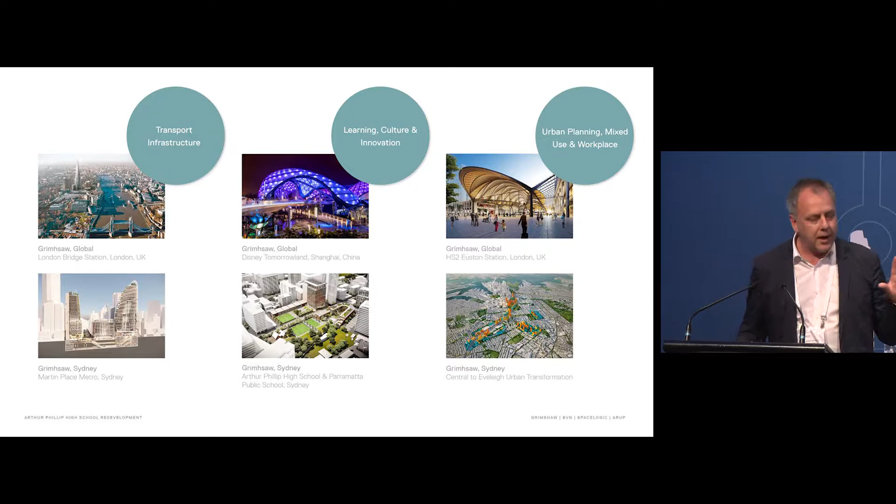We're a global practice, operating across a number of different continents. We have over 500 schools. Why is that important? Because we're designing schools for the possibility which that represents to many people. This idea of globalism is something which is now becoming a really interesting part, and why you're here. We work across many typologies, from transport, learning, and obviously urban workplace. All the threads of that come into how you consider the design of a school, where it goes, and what its end purpose is.

This is a scheme I'm going to present: Arthur Phillip High School, predominantly a competition scheme that we won with Bligh Voller Nield, Spacelogic, education consultants who worked on the UK's Building Futures program, and Arup doing all the engineering and Aspect the landscape architects. We've had 180 stakeholder engagements from design, and we're on site at the moment.

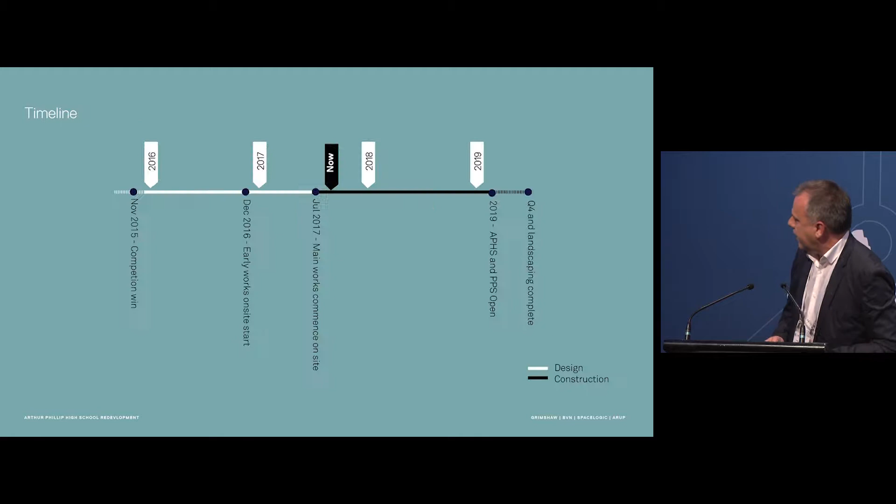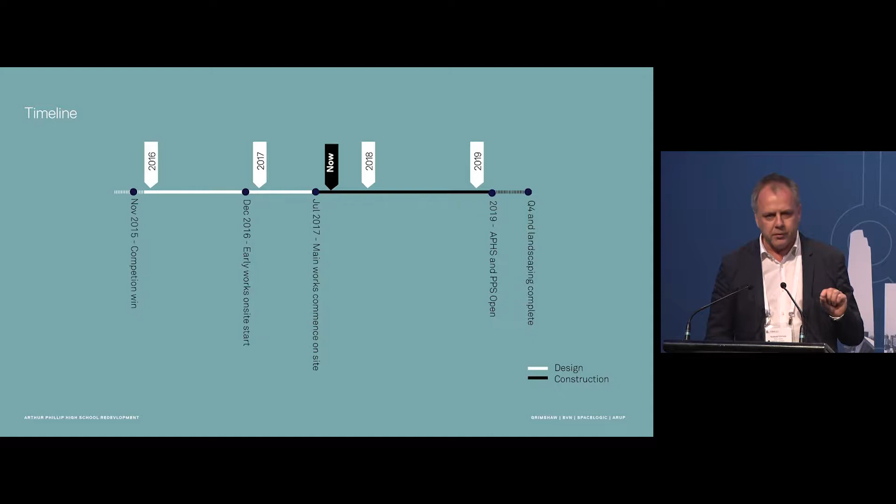It's not just a vertical school, it's a new educational prototype for future-focused education, with a transition phase from the current curriculum. It's a brand new building typology as well, which has been completely engineered. It's been rapid — we will have gone from award to construction completion on this project in 3.5 years. And that includes fundamental changes to the industrial legislation of teachers to enable them to work in a building like this.

Why is that important? When we get to Sydney — Sydney is 24% of Australia's GDP. We don't have any mining and we don't have any farming, so the majority of Australia's GDP growth and the significant change is coming from our major East Coast cities. What's underpinning that finance and construction is innovation, knowledge services, creative industries.

The future of our nation, its health and prosperity, comes from education. It comes from its understanding of its place, its interaction into global economies. We are a global city, and we are educating our children into that situation.

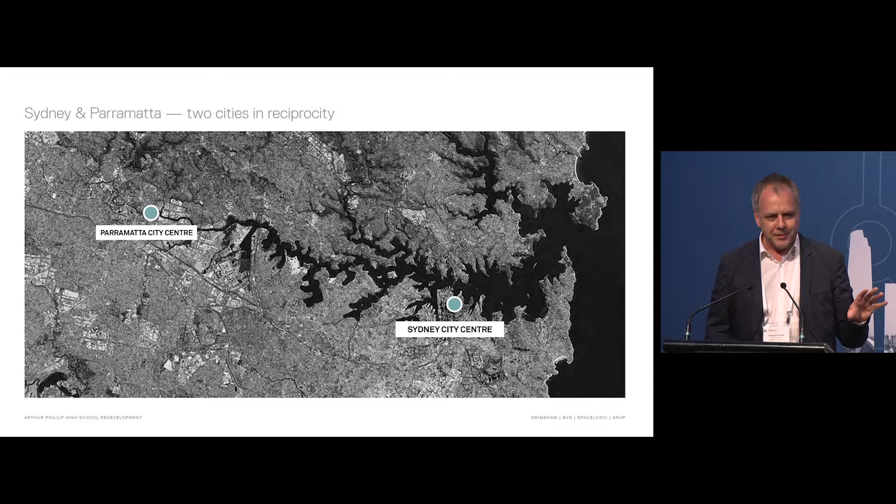We all know about the fascination of Sydney. We always talk about Parramatta — I love to use this term ironically, where settlement first occurred. But we all know that on this particular site, Arthur Phillip, we've uncovered 40,000 years of evidence of Aborigines on this site. So it is an interesting place to put this building.

We call them the two cities, working in reciprocity: one as the demographic centre, and also the place where it's at the centre of how we address population growth, but also looking back to Sydney where it still remains the preeminent location of our global city. Even though the Greater Sydney Commission has us working in 3 cities, Sydney is still the centre of where that productivity is focused. What does it mean for schools?

We've got a lot of schools to do, and as it came out in the papers today, a lot of the growth in schools is still relying on demountable classrooms. So building big, dense, quick schools is one of the key opportunities to address the pressures on education.

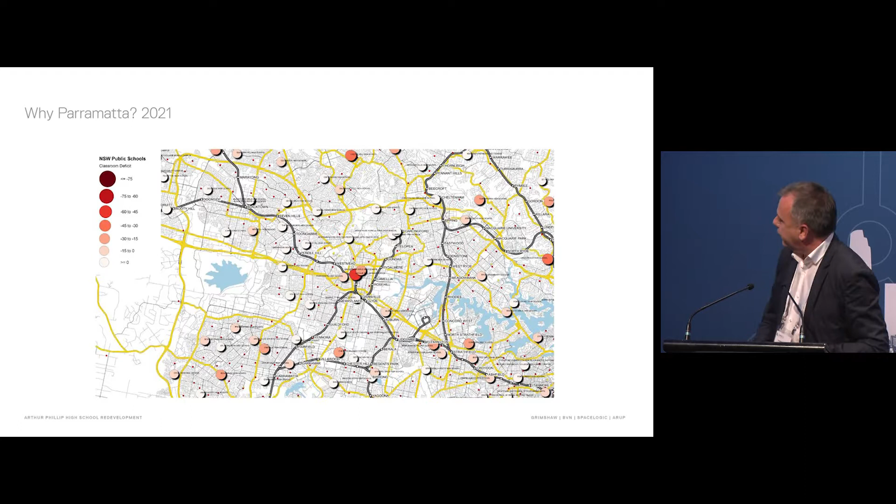Obviously we all know Parramatta — I've got to move very quickly. Other thing about Parramatta, it's got some of the most diverse communities living there. So the department have chosen one of the most interesting places to build a new school prototype.

And what does it mean to the city? The big thing about schools now is that they're shared social infrastructure, so the facilities of a school become shared with the cities they're building in. With Parramatta School, they've put a large school at the centre of the city — learning at the heart of centres for urban renewal.

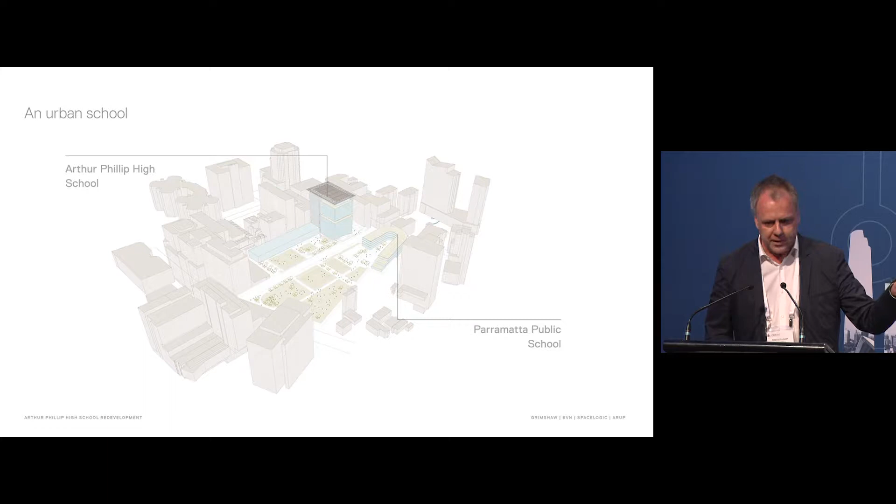Again, back to that theme — the priority to understand its place within the world. Exchange can happen in many ways, including the ability to have digital interaction. So, the school: 2,000 students, 17 stories, 1,000 students for the primary school.

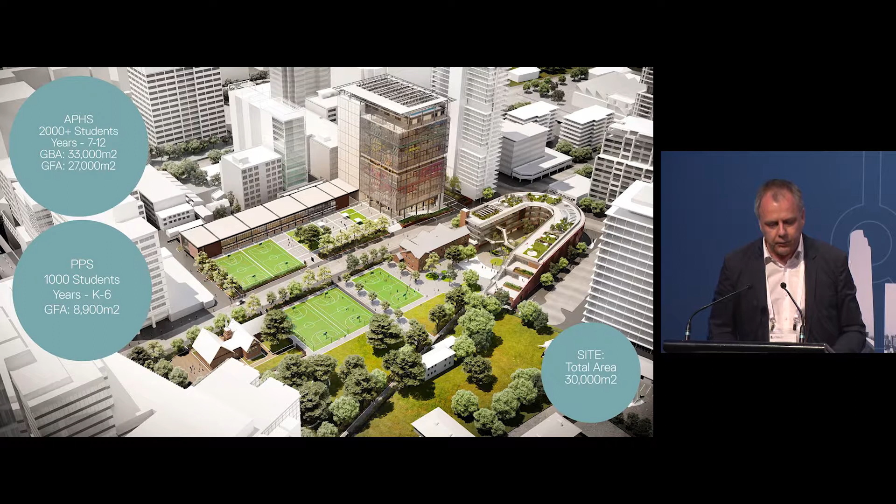Teaching — we all know we're going to address pedagogy here, which is about learning styles. Teaching used to be the didactic model in classrooms, which everyone knows about, but we're transitioning into future-focused learning in a vertical environment. What does that mean?

We're talking about breaking down schools of that size into smaller communities — we call that the school-within-school model. We're moving to stage, not age, learning, so all ages, all stages in communities, and project-based curricula — learning through groups of people focusing on experimentation and group-based investigations. You'll hear about the STEAM uses: science, technology, engineering, arts and mathematics. That's where the key innovation is being focused on at this moment.

So, how do you design a school?

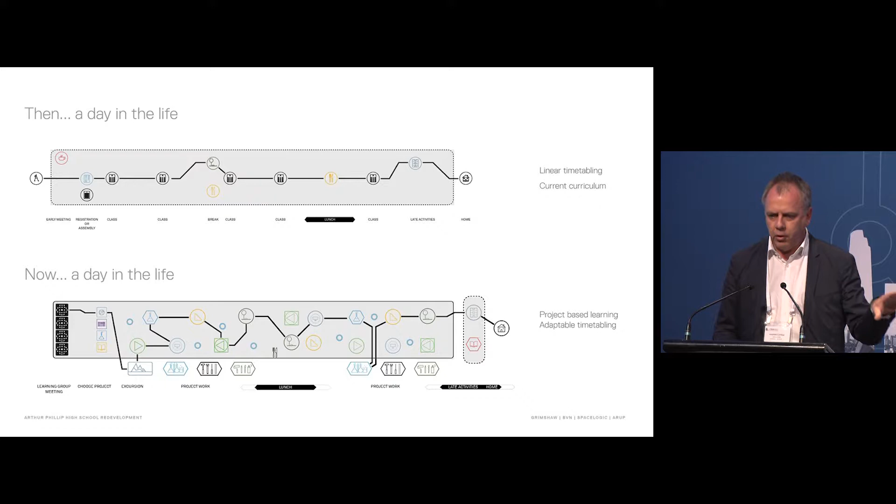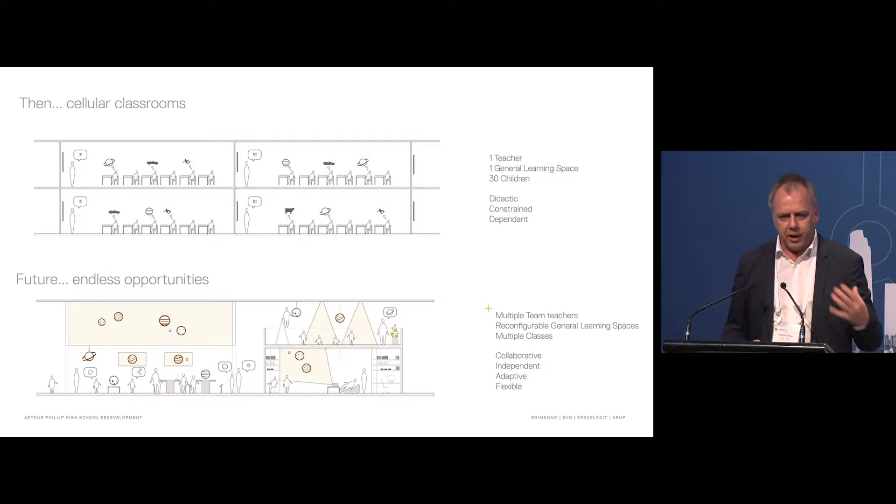We're moving away from periods where you step through the day through a series of times. Now, with project-based learning, you use your facilities to design your own learning format, so it's not as structured. This idea of how you structure movement becomes critical, and spaces are much more diverse, have greater volume, and are used for a variety of things.

With a school of 2,000 students, we've heard about Dunbar's number, which says what's the maximum amount of people you can have in a community - it's around 150. We're extending it to around 300 to 330 for a school. In the primary school, we break it down to 3 communities plus a kindergarten. In the high school, it's based around 6 communities of around that 330. We put the communities in what we call home bases.

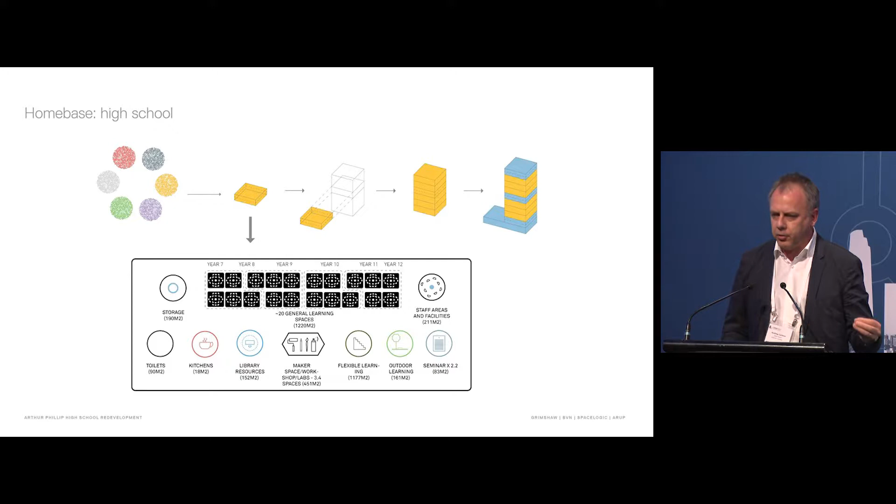A home base has all the needs for your school day - outdoor learning where you do practical activities, withdrawal rooms, bathrooms, storage, and all the facilities. In a high school it's much more diverse, including the library - you no longer have libraries as separate spaces, they come to you. You have flexible learning, formal learning, informal learning, outdoor learning, seminars, and some labs as well. Staff are located within the community, and all the needs are there.

The historical derivation of the school - classrooms from the 70s, breaking up in the 80s with more flexible furniture, then moving into the 90s where classrooms have been adapting and opening up together. Then we move into the academy model, which works up to a maximum height of 3 to 6 stories, where flexible learning opens up into informal learning connected through circulation, with many different types. Most of those schools in Australia that have been 3 to 6 stories are less than 1,000 students.

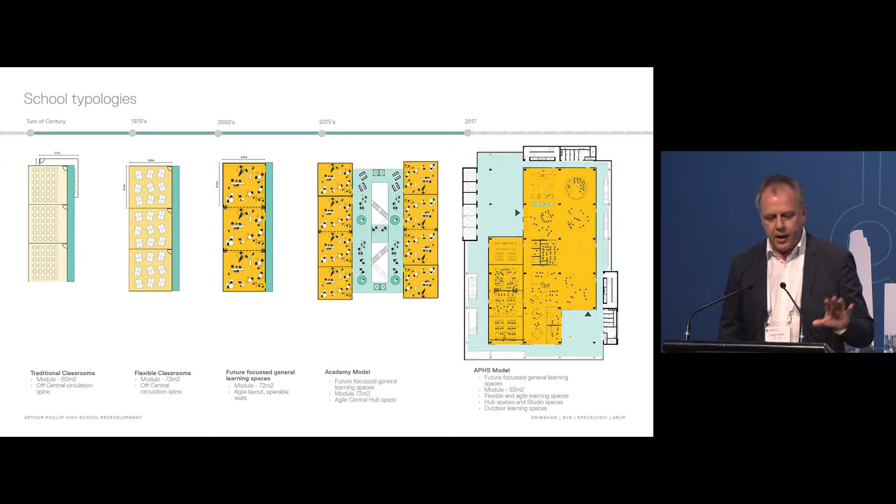So for 2,000 students, we're talking 17 stories, big floor plates, big needs for circulation to work and support access to a variety of spaces. The 17 stories we break up - I'll talk about in a moment - between 6 home bases, which are over 2 stories, and we have STEAM floors in between base, middle and top.

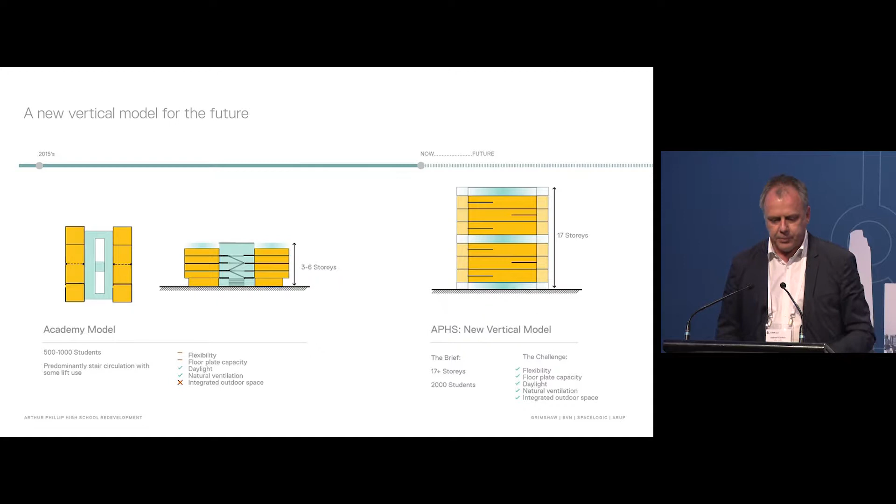We also talk about the relationship between schools, universities and workplace, the intersection between millennials, Gen Y and Gen X, knowing that we're always designing for the future, not for the current or the past. And the focus on learning, from learning to enterprise - understanding what the purpose is behind learning. Learning is not the same as you go through different age developments.

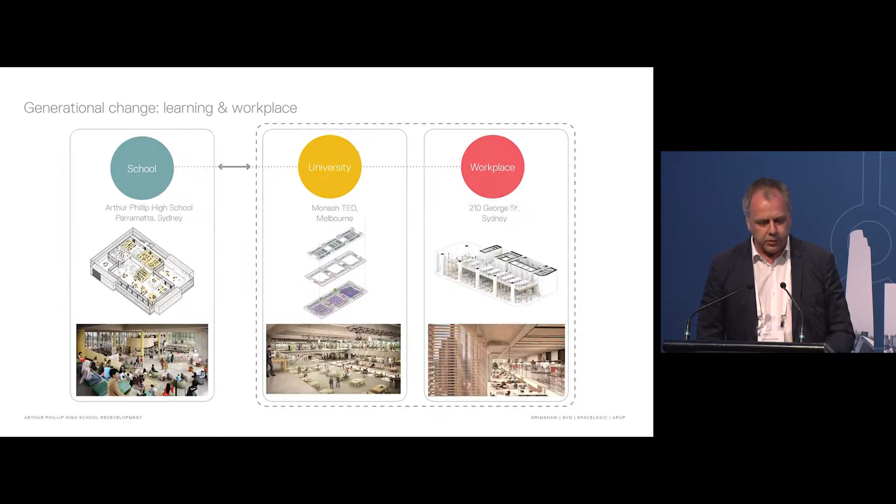Again, I'll run through this very quickly because I've already hit 15 minutes. So quickly, what it looks like.

That should be an animation. I hope - no? I need it to work. Technology person, can I have a pause on the time frame? It's not playing. That's not good, I'll give it one more try. They said it would work. All right, that was the animation, which was just going to go all the way through the building. Right, improvise - how does it work? Now that you've seen what it looks like, now I'm going to show you how it works.

We talk about a transitioning model of a school, meaning we have to understand the current curriculum - you can't go into the future without transitioning from the current. While we've broken it up into 6 communities, based in years 7 to 8, 9 to 10, 11 to 12, we've curated what happens in those STEAM floors.

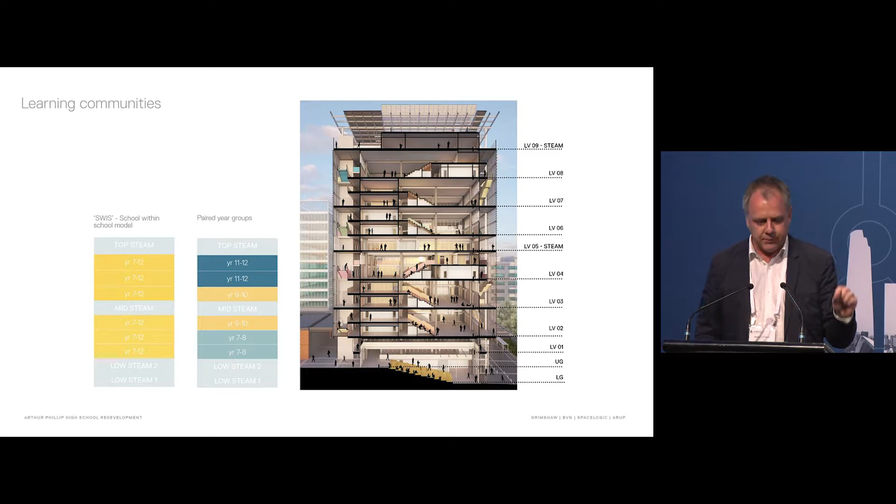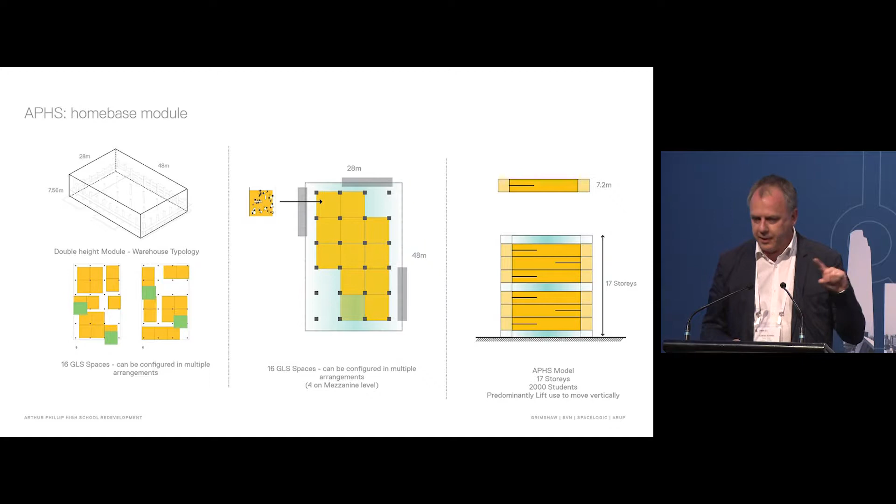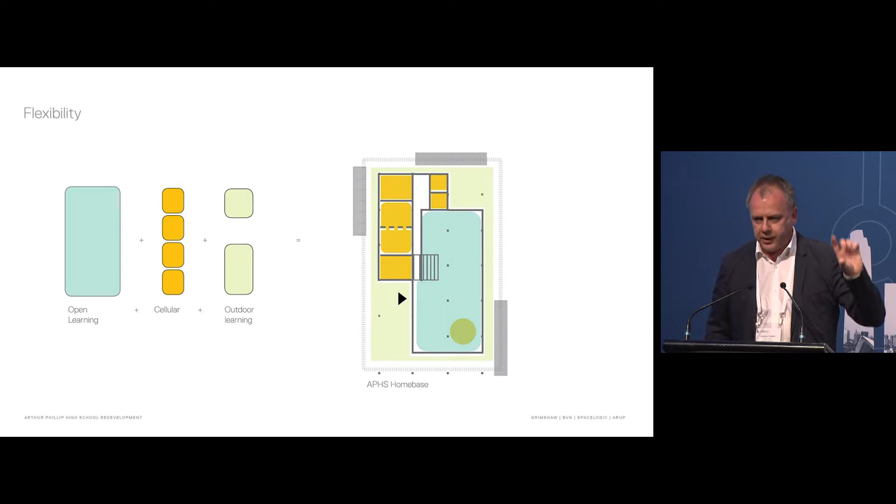It's based upon a classroom module of about 90 square metres, including circulation, which we then aggregate together into 16 modules. In those 16 modules we then have outdoor space. Then we put in that space a mezzanine, and the mezzanine has what we call the cellular spaces, which can be used for traditional classroom teaching, or we can introduce some dry labs, seminar rooms, or quiet spaces. Then you have the open learning, which has got the future-focused learning in the double height spaces, with a whole series of different teaching furnitures which support it.

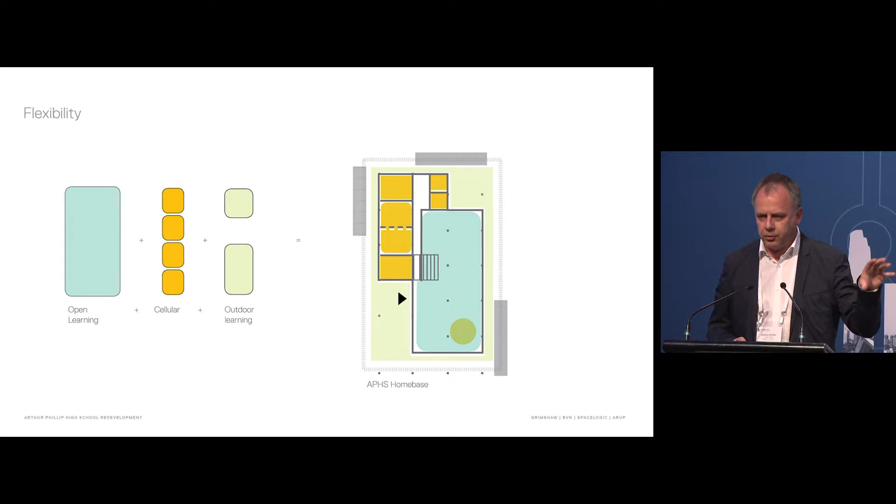We've got the outdoor learning space wrapping around it and adjacent to it, so you can live in your community with your outdoor learning at any level in the building. The home base, the multi-purpose range we've gone through before, but the important thing to state again is that everything occurs in that space. In terms of moving up and down, in a vertical school you get to your home base, you can stay there for the day and just move up and down between the STEAM floors if you need to.

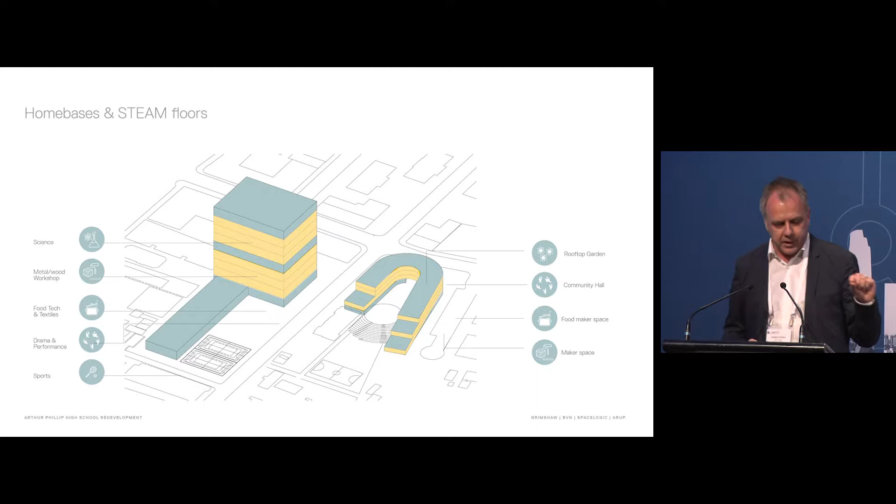And of course, we've situated it so that the levels at the base can be used by the community, and they've got drama, performance, sports, food, tech, and textiles. In the middle, it's got the intermediate levels focus on enterprise, which is the workshops and digilabs, and at the top we've got the science laboratories where they have the highest need on services.

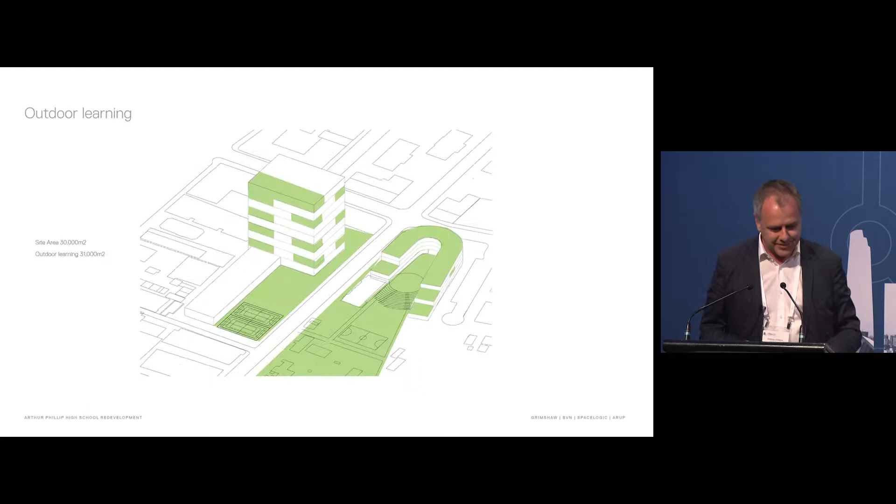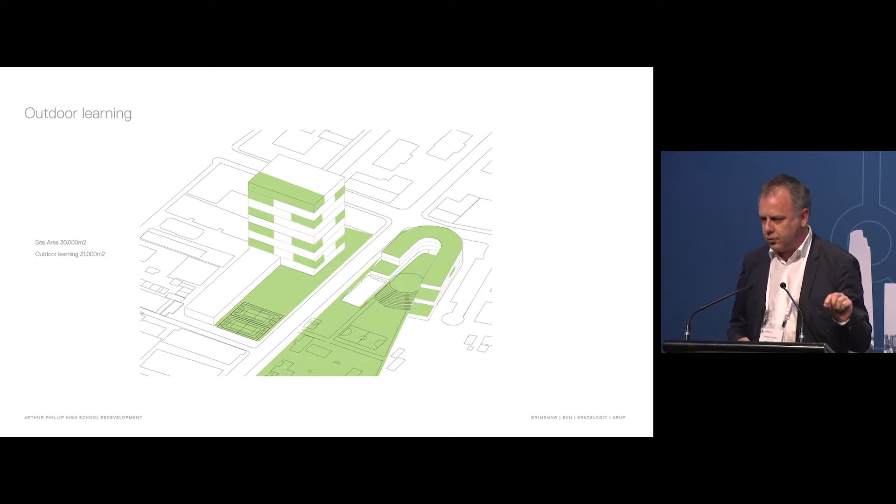On the primary school, of course, we have the rooftop terraces. The amount of outdoor space, the total site area is 30,000 square metres. The outdoor learning spaces are 31,000. So the idea is that you don't lose outdoor learning space. What we're saying is if you take your space and put it through the building, there's no loss. This is a school on an existing school site, but we've increased the density by 100%.

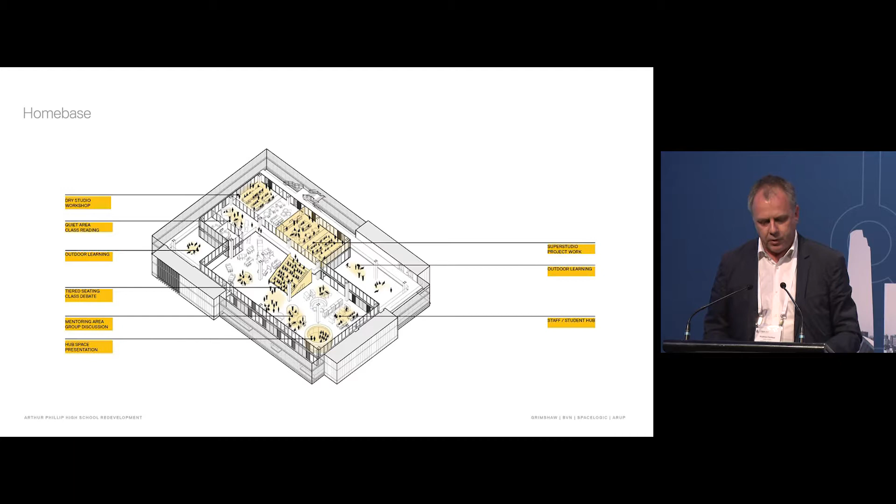Going to the home bases, this is the structure, how they work. The L-shaped mezzanines sitting in front of or behind the double height space with the outdoor learning around it. The educators or teachers now roam around. They've got their own little trolley which they move around, and their own staff hub within it. And then they begin to look like these spaces. Almost the height is important for getting the right level of environment, daylight, ventilation, but the volume that you need is to get people looking across each other and interacting with each other, and to do that problem or project-based learning.

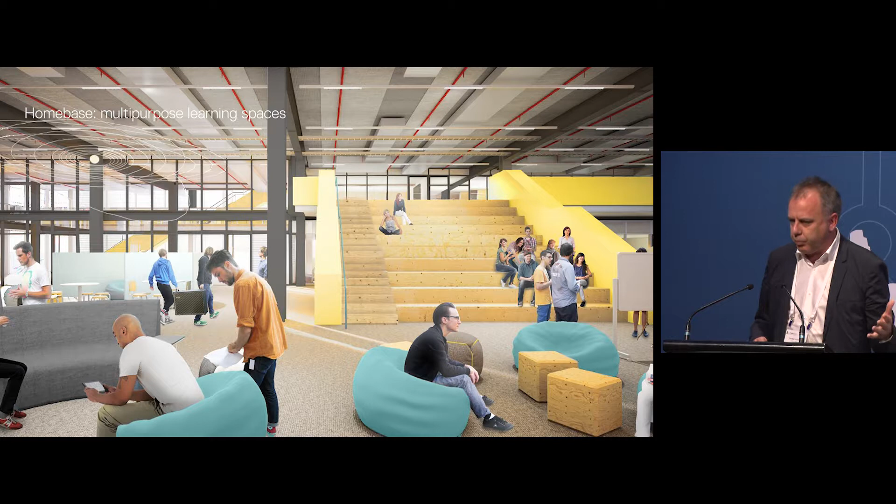The outdoor learning spaces which are offered are outdoor, they're screened from the rain and some of the high level winds, and they have the vertical circulation, being the lifts or stairs, meandering through it on all sides of the building. The thing here is that while they're exposed on some climate, there's always two on each level, so you can move around the building or up and down to get to any place with the right level of clemency.

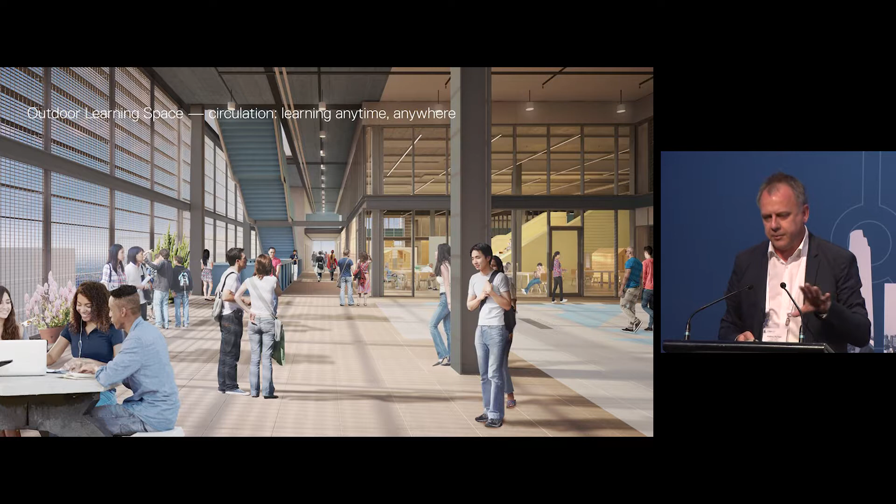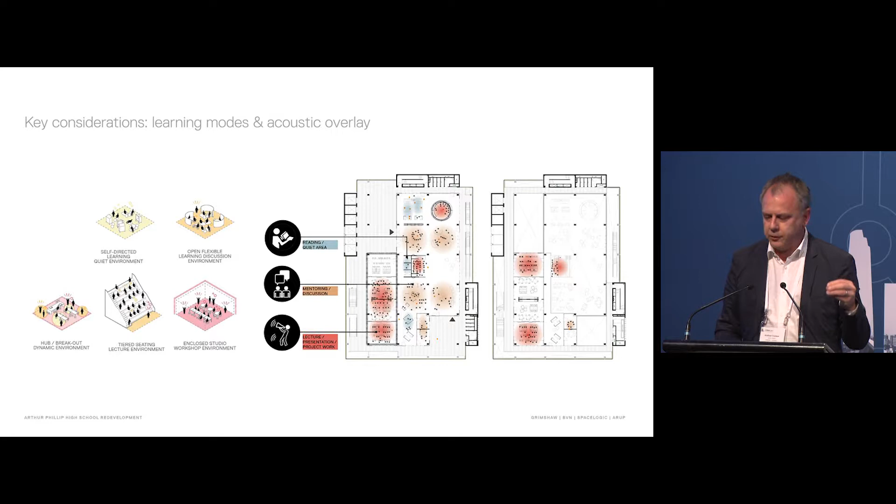Acoustics is incredibly important. You've got the learning furniture, which provides the acoustic abatement for low and high frequency. If you don't get the acoustics right in these spaces, the buildings fail. Incredibly important, more important than vertical circulation.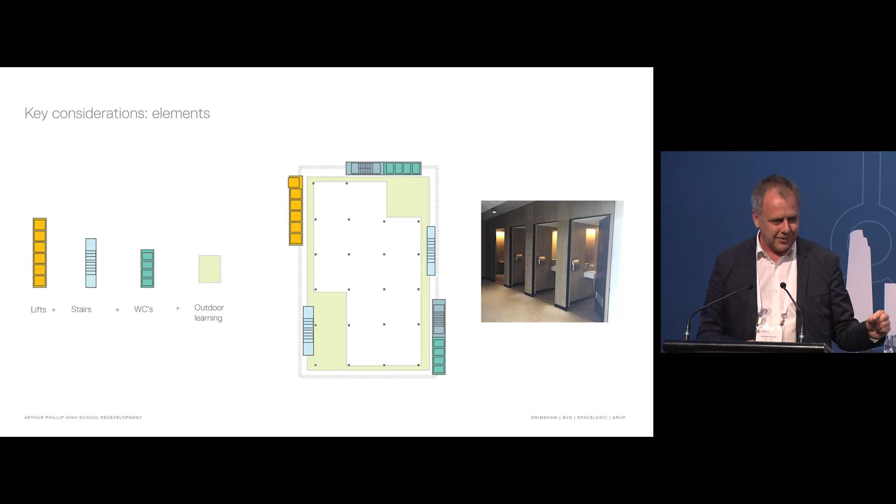And so for vertical circulation, we had to change the timetable. It's staggered timetabling, so each year cluster starts 15 minutes differently to each other. It changes the peak load, keeping the vertical circulation by the lifts to a minimum, and then you focus on the stairs in between. And that's the key to it. No escalators. Escalators use unnecessary energy, and it's better for children to have the health of movement. And I'm 100% serious about that.

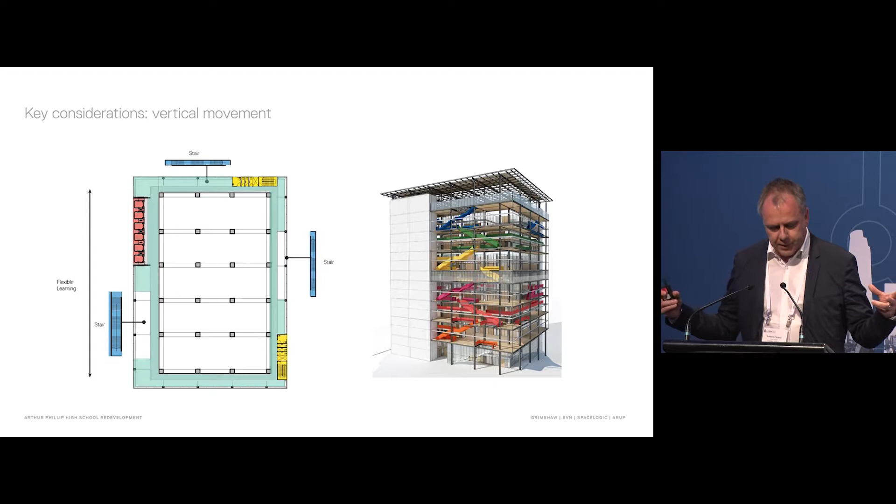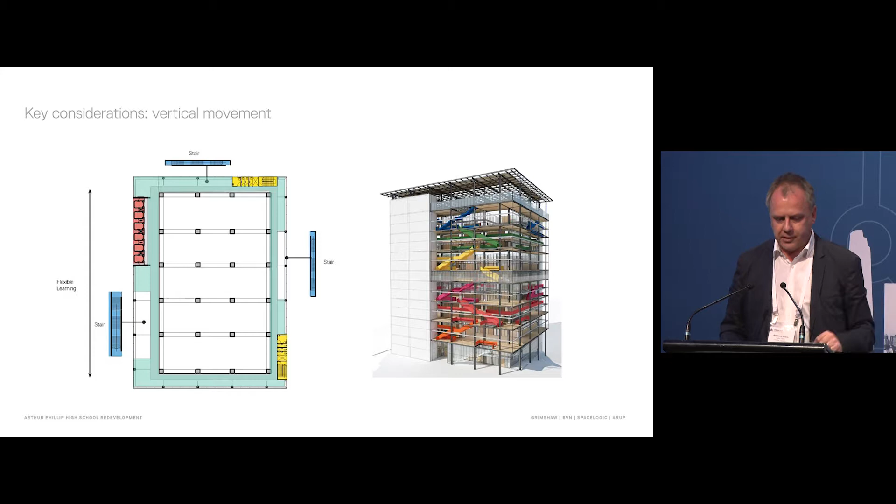And then as a structural thing, it's a systems-based building. So we've got the cores, which are concrete cores that keep the building stable with a steel frame. The steel frame is there because of adaptability, but also for its speedy construction. It's a building where it becomes a pedagogical instrument, so the building teaches the student how it's made, how it's performed, and it's interactive and designed to be modifiable. Six lifts, only six lifts, when they drop off at each second level at each home base.

Obviously there's a lift for each floor in terms of accessibility, but then you understand what the teaching program is. So we've got the more junior students down below, intermediate in the middle, and the senior students up the top. That's how it fell out. It could have been completely different, and in the future we're looking at where everyone mixes together in terms of stages. The lift design enables that in combination with the stairs.

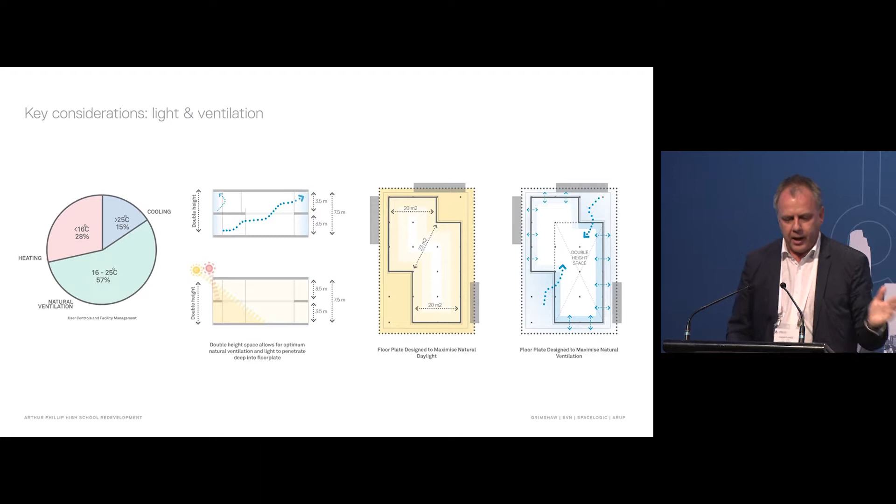The volume allows an abundance of daylight at the high level. At the low level, you've got all the teaching services that you need. Everyone's writing on it, projecting, and that need for cross-ventilation. This is how the building works.

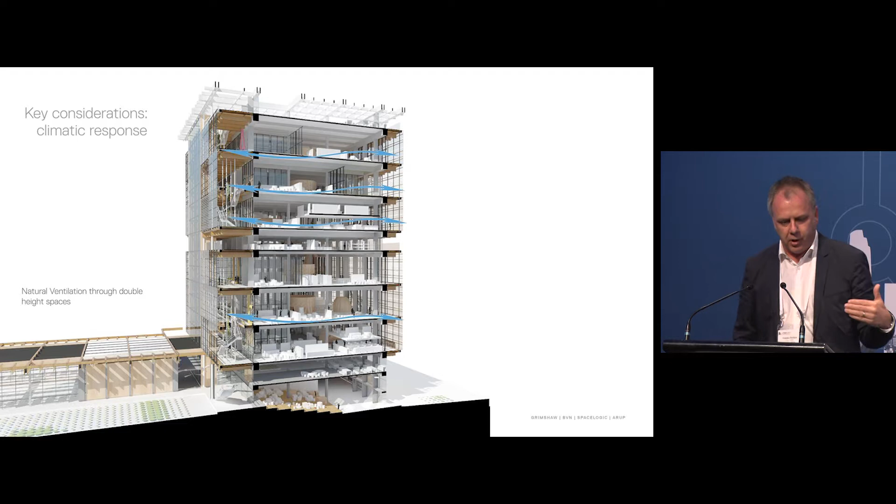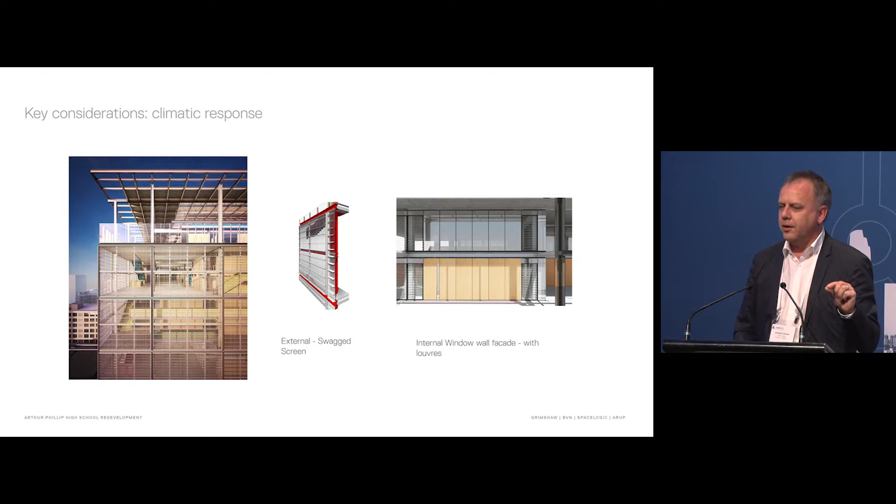So it's a new building type. It's got an internal core, it's got an interstitial space which is open and breathable, 80% open, but that gives sufficient screening from the rain and the high-level winds. It's got different densities on it in terms of where you move through it. The screen is very, very strong—it has to take full student loads when they're throwing each other on it. It can't be scalable, and it's got to stop birds and all sorts of vermin getting there.

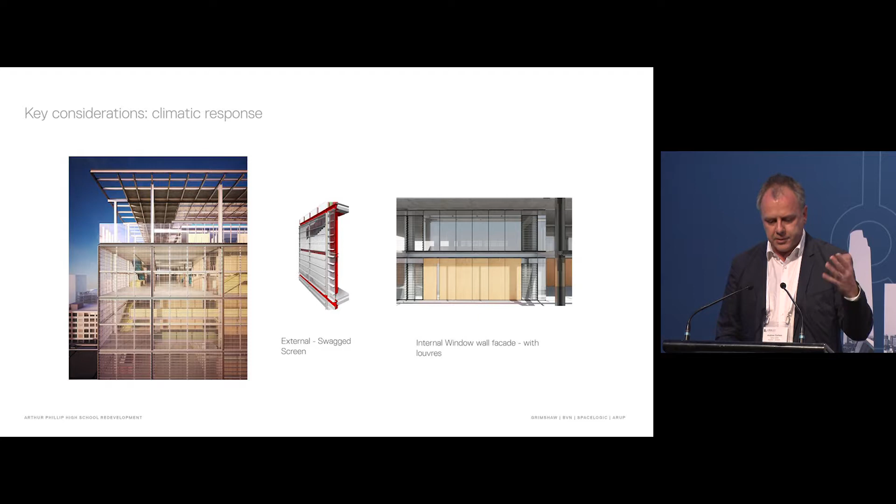So a very interesting facade to go onto a very interesting building. The back part, which encloses the space, is a standard window wall with manually operated louvers and window openings.

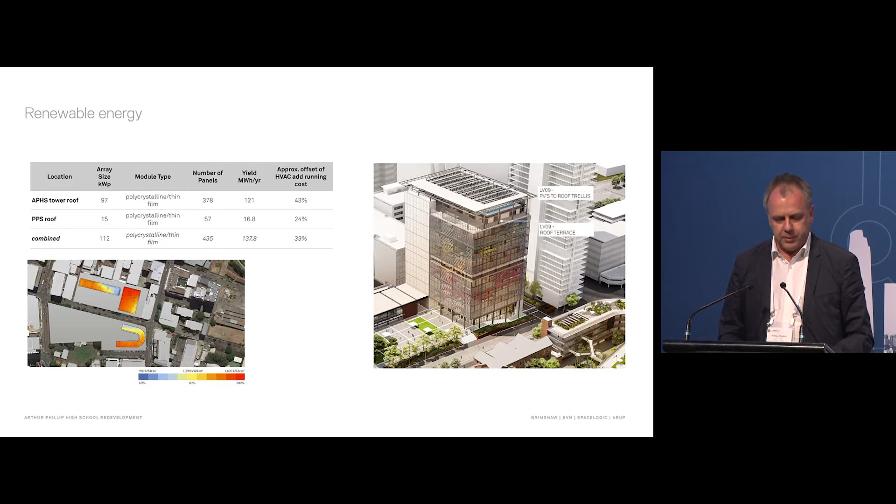So going back, photovoltaic cells provide about 40% of the energy usage for the buildings. Structural frame I just spoke about. I'm going quick because I want to talk through things. This is a little model. Everything in the building is expressing itself.

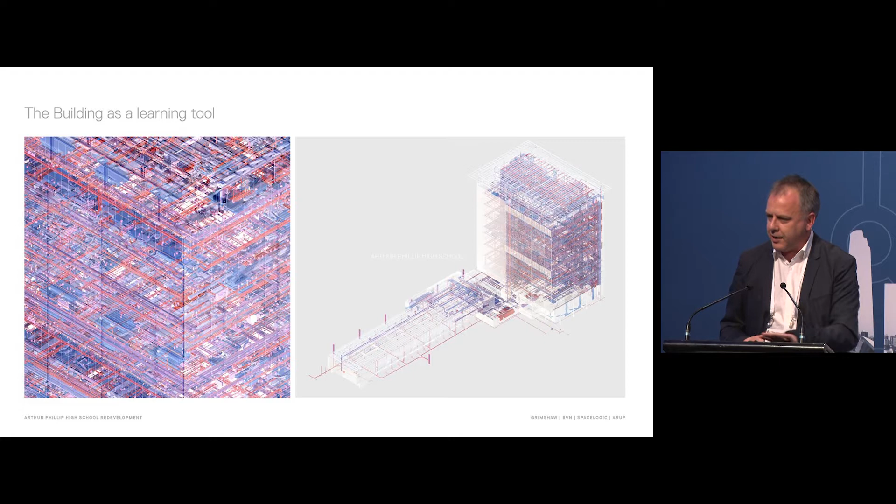The idea is that students can understand their own internal environment and they can program it. It's not something remote—everyone can get on their own programs and see how the building's working across the day. That'll be displayed with little red light, green light indicators when temperatures are changing, but the students can refine that themselves. So the building is a testing building, and as we begin to know how it's used, you can change it.

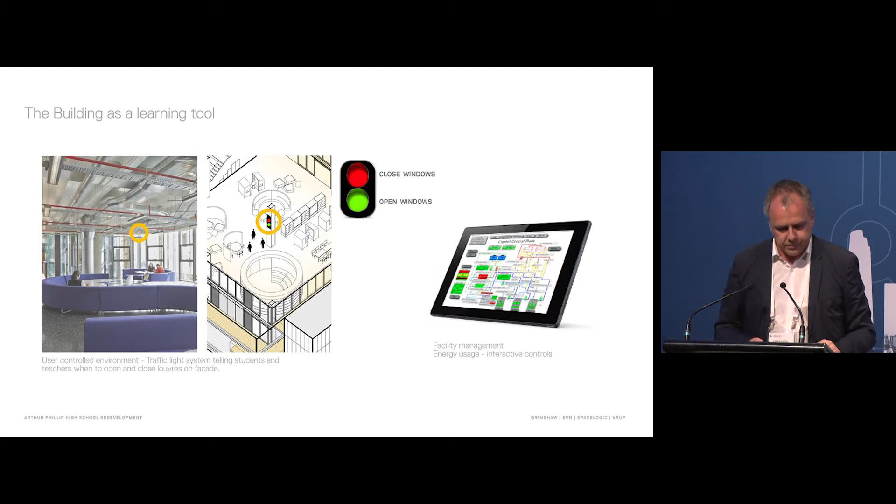Wayfinding identity helps you actually understand your place in the building. And then this part of the public realm is both secured during its day use, and then open for use by the community outside of school hours.

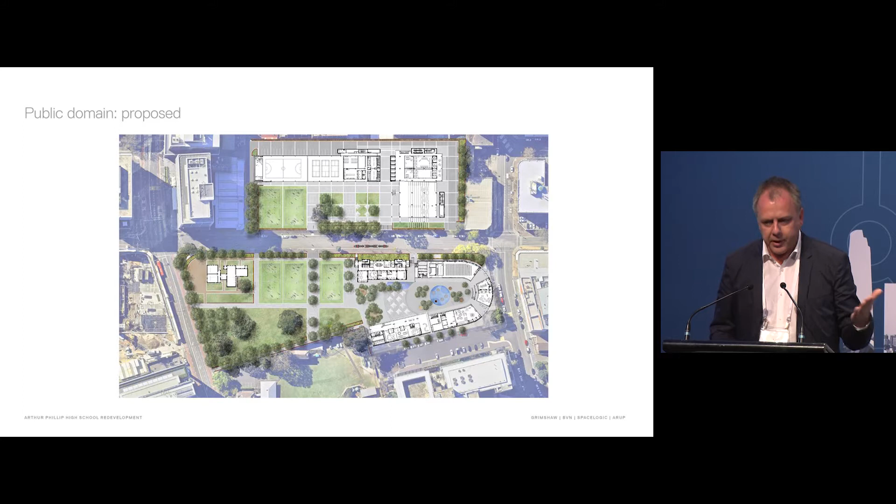As the community gets more greatly involved in the school, we believe that need for such high-level security will begin to diminish. That's the objective, so the school has an intention to be integrated into the public realm, even though at this transition phase it's still secured.

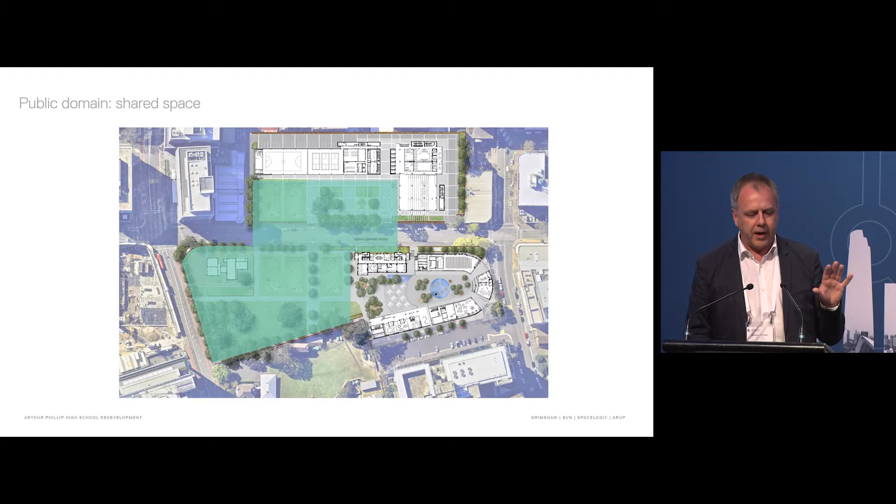But it is programmed to be part of the community, and that doesn't just mean being open for use. We've allocated a number of ground level uses—the tiered learning spaces, performance spaces, gyms for markets—that becomes part of a curated program between the department, the school community, and the council for its use.

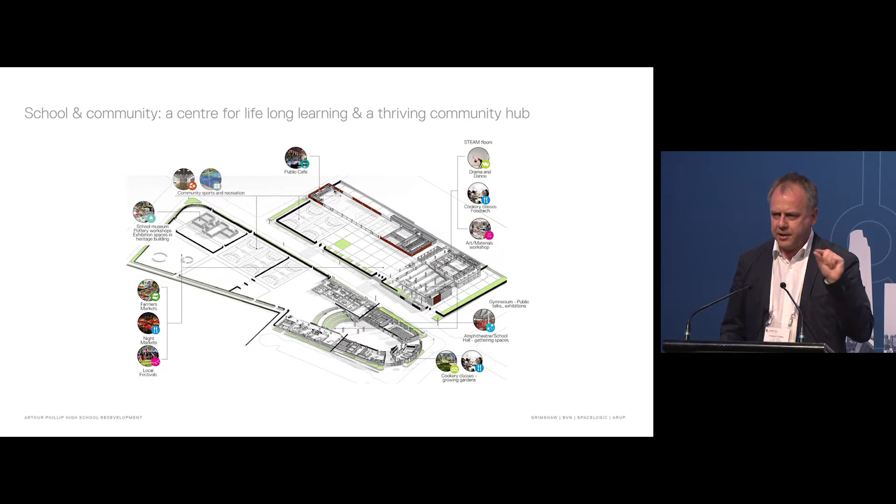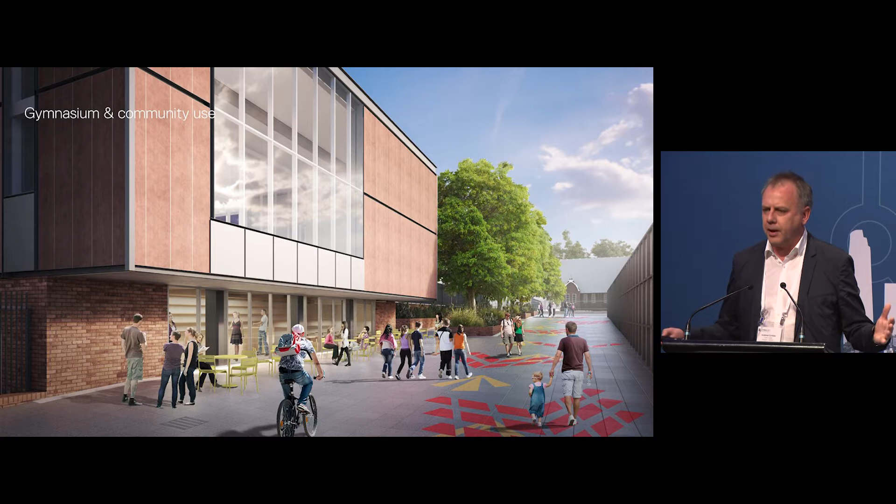So as a school at the centre of urban renewal, it becomes a pivotal point for community. The social agenda of our cities begins with our schools. Looking at some of the spaces, there's a very large gym which doubles up, cafes which activate your public realm interfaces, opening up on weekends for markets.

The final thing I want to talk about on the school is the cost. There's lots of reports saying vertical schools are too expensive, that you're not getting value for money. Well, you are—the school completely fitted out is just under $4,000 a square metre. The average low-rise school is around $3,300, and an average commercial building fitted out is $4,500 a square metre. So in terms of benefits, it gives you social infrastructure, public realm, and a school.

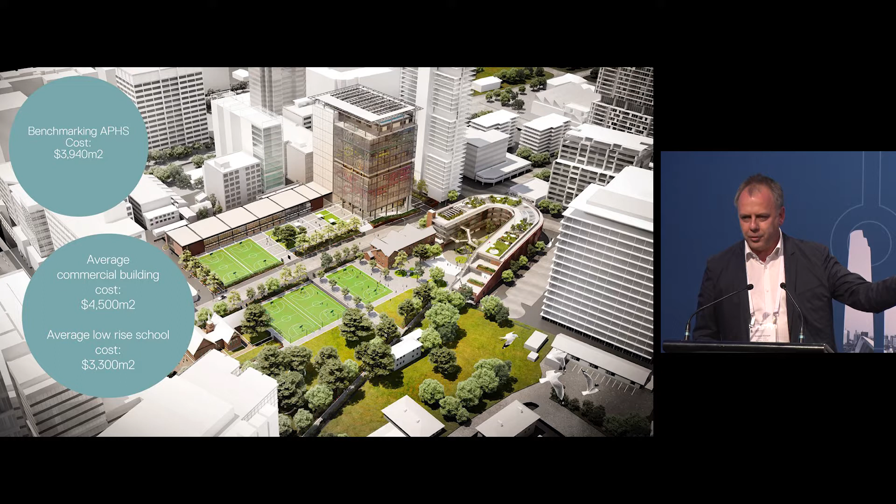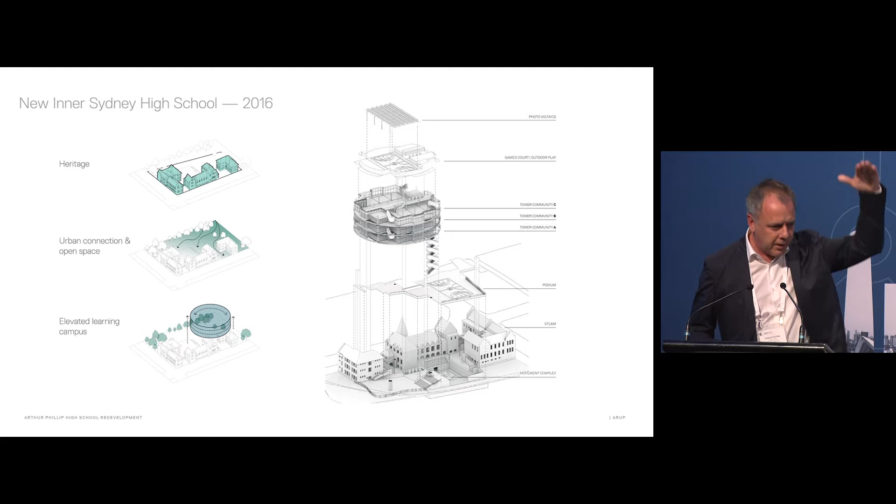Now that typology is pedagogical-led design. It's not about designing an urban form and fitting in the classrooms or the tall building and making a school work. A school designed for the future, focused learning in a vertical environment—that's what the typology is. It can't be adapted into a commercial office building.

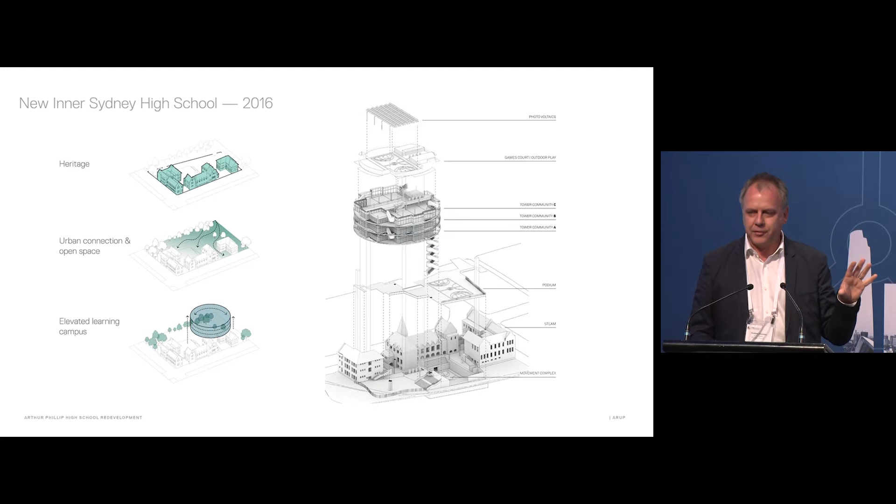And we have to consider school communities which go over 10 floors. This is one we did which FJMT won for the inner city school, but we took those same principles—we lifted the school, had the public realm coming in. But it happens with universities as well.

This is an approach for a building we did for New Space at Newcastle. The point here is that these vertical buildings, which have innovative learning environments, are going to be inserted into high density regions in beautiful locations in lots of different contexts.

And the thing is that they can work very well—they are publicly benefit oriented. I think the next point, probably the final one, is that where we live now in the community, everything's got to pay for itself. And these projects require a lot of investment when we've got a lot of schools to build.

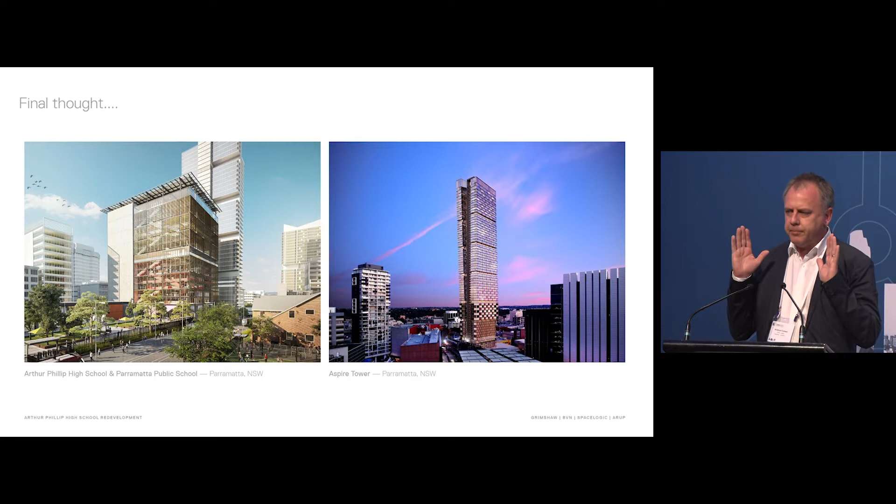We're also planning the intensification of our town centres. The moment we see the need for schools is to enable intensification. We've got a vertical school model which is now separate to the buildings being built adjacent. You can see in this model here—this is in Parramatta, so it's been planned.

We have a 50-storey residential tower which was approved only 18 metres away from our building, and that landowner enjoyed the full benefit of that uplift. Even though there's value capture now, it's still quite minor. I mentioned Aspire Tower—we won and lost it—but it was a project with 243 metres, about 700 apartments.

Where we are now is we can consider that if you get the delivery of schools integrated into urban renewal centres, where they're not separable or parasitical on each other, but if you begin to join them together, we have the ability to get self-funding or major contributions to the cost of schools through the opportunity for urban intensification on town centre sites, where the two could merge.

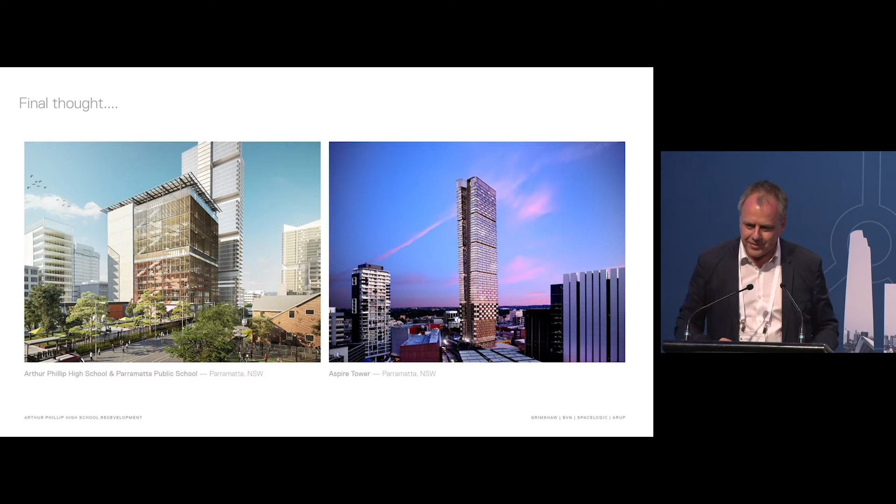The value capture of the Aspire Tower in Parramatta, which is only 300 metres away from the school, could have paid totally for the new high school. So the two could have been one if it was planned together. That's just a topic for this forum—that holistic planning across all departments is, I think, the opportunity to deliver urban intensification with innovative schools.

Sorry? I can try the video, yeah. I'm going to go over time if I do. But yeah, if you can play it, that'd be great.